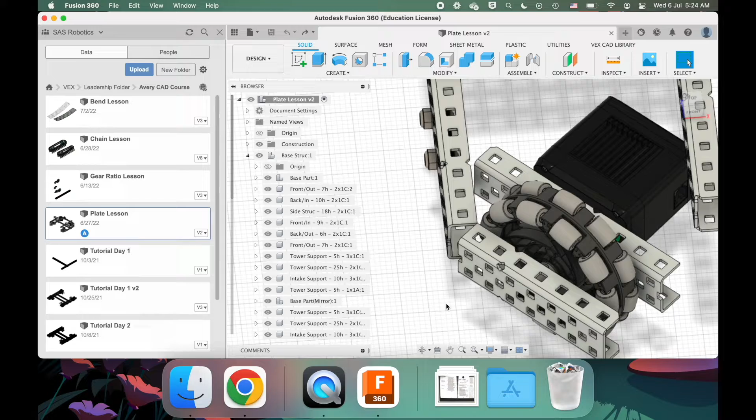In the next few videos, I'll be explaining how to make plates in Fusion 360 and applying that to this drive, finishing this X drive base we have here. Now, this isn't a full video on how to make X drive bases, but I will explain some of the design rationale behind this X drive base because it's somewhat relevant to the plate creation.

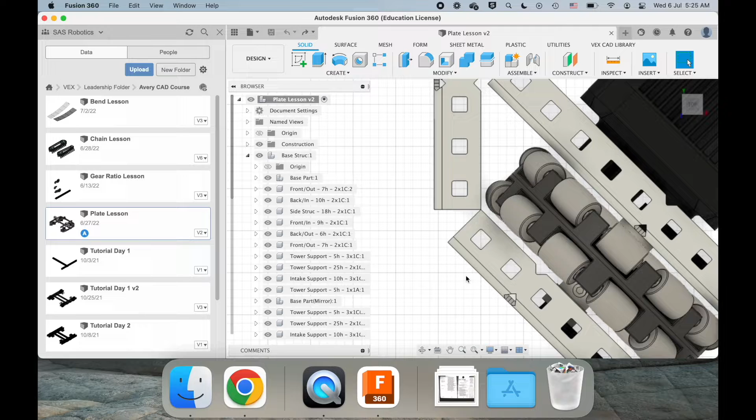Okay. Key thing to know about plate creation is that, because it's a custom plate, it can have all sorts of wacky dimensions, because these kinds of plates are made of Delrin and cut on the laser cutter, which can handle weird dimensions, unlike humans cutting with like a bandsaw or something, right? So just keep that in mind as I go through this.

So for starters, all the wheels in an X drive base should be at 45-degree angles. You can see that here, and it should be close to a perfect square. Now you can see this drive base here is basically a rectangle. It's not a square, but it's pretty close to one, so it still functions effectively as an X drive base.

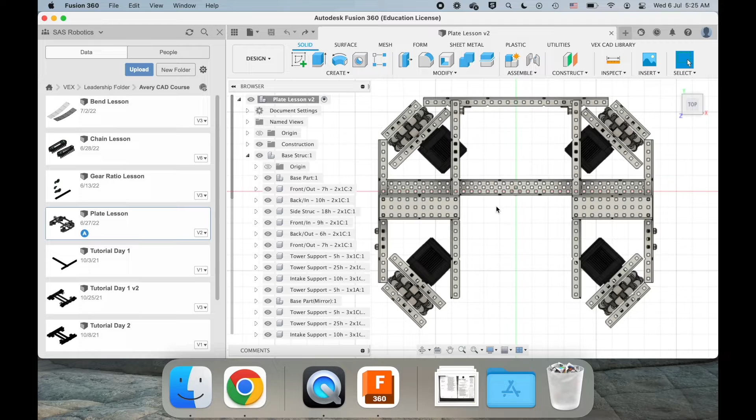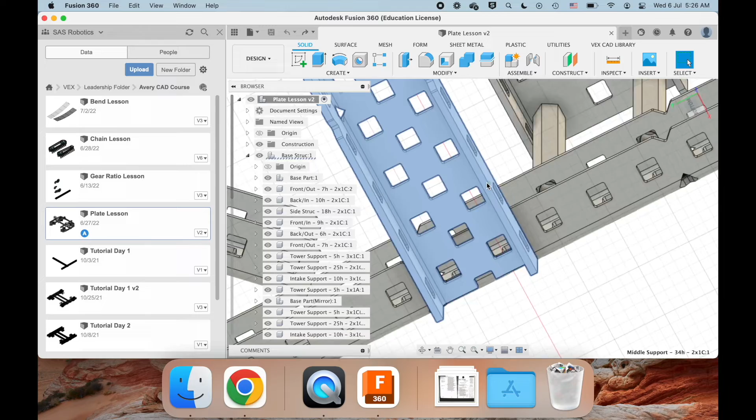Now getting to some of the details which are relevant. You know, when you're lining up holes across C channels, you want the holes to actually line up, right? So for this 34 hole C channel going across, it lines up perfectly on both the left and right side, right? And I kind of built the module from there.

There's not really much aligning going on over here. I can make the geometry basically whatever I want because I'm just going to create a plate that wraps around and connects these C channels together, right? And so the same thing goes for this piece. This piece is centered following this C channel here, right?

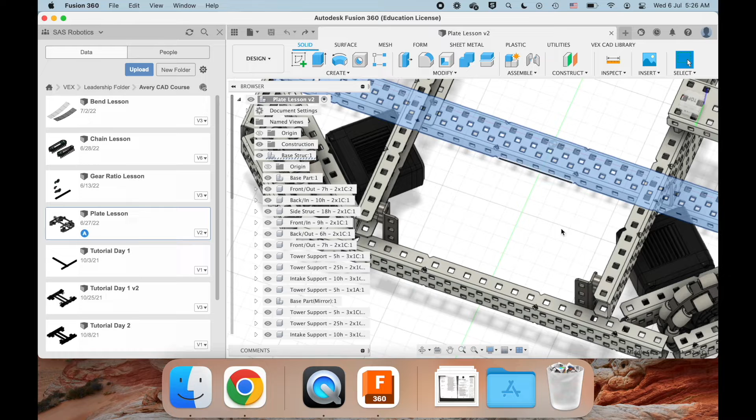So because there's a gap here, that really doesn't matter because I'm making a custom plate that connects the two C channels together, right? So in most cases, you want to just line up the holes of things that aren't very flexible, like a C channel joining a C channel, right?

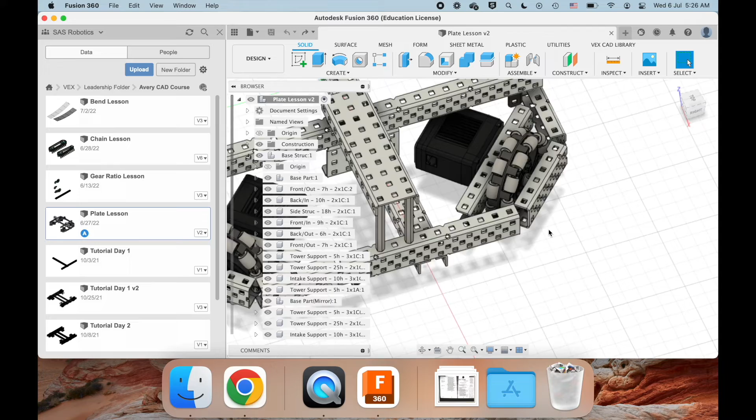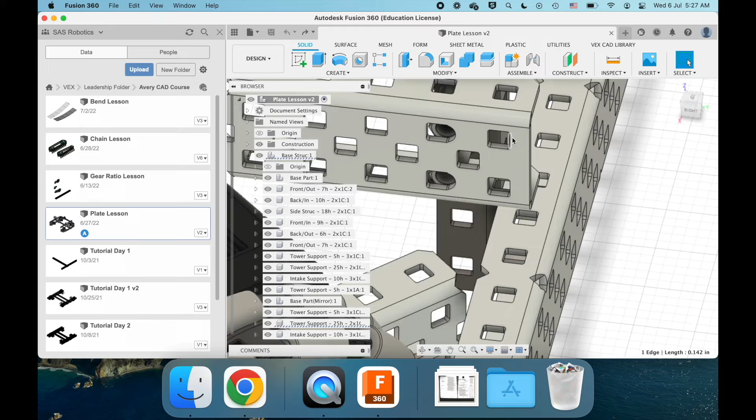In this case over here, I will say that I did edit the C channel, because in this example, if I lined it up perfectly, that would pull this C channel into clipping into the wheel, which is not physically possible and not something you want. An alternative would have been moving it to this hole to the right here, but that wastes about half an inch of space, which I couldn't afford to waste.

So I settled for creating this janky looking hole here, right? But in general, you want to make your C channel holes line up as much as possible.

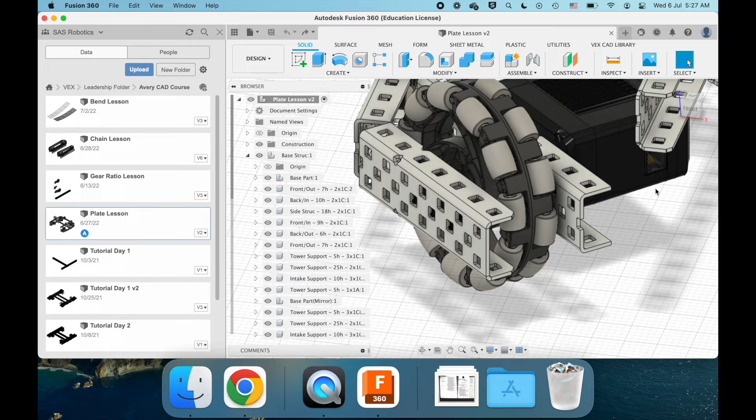Okay, one more thing I'll point out is that between these two C channels here, I used standard spacers. I didn't want to use some kind of custom spacer. So the distance between these two is 1.6 inches as measured in the CAD, because there's bearing inserts and whatever. It chalks up to 1.6 inches, right? And normally that would screw up aligning holes across these two C channels here.

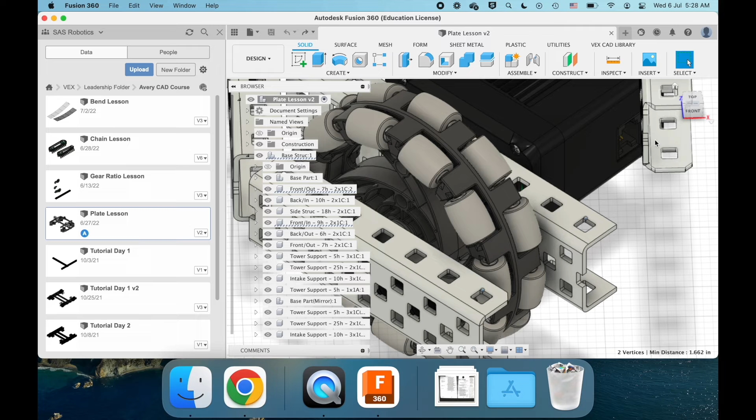If I use some kind of standard plate, you can see minimum distance is 1.662 inches. There isn't some kind of plate that has that kind of increment, but we're making a custom plate, so that doesn't matter.